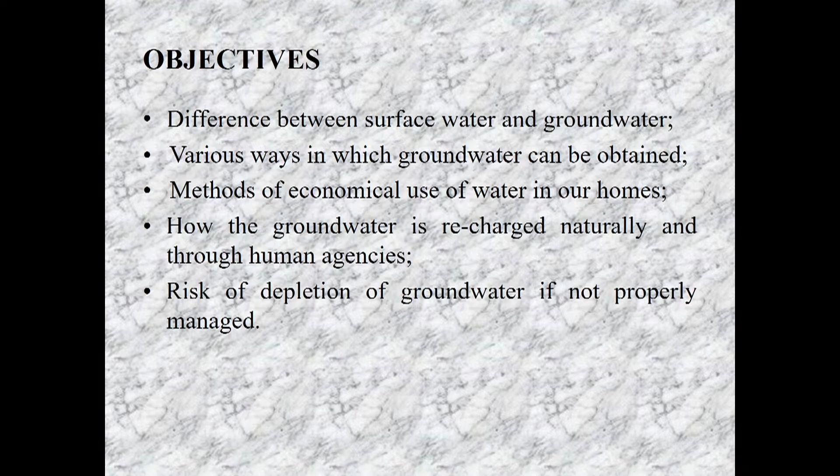During this program we will discuss the difference between surface water and underground water, various ways in which underground water can be obtained, methods of economical use of water in our homes, and how groundwater recharges naturally as well as through human agencies. Lastly, we will discuss the risk of depletion of groundwater if not properly managed.

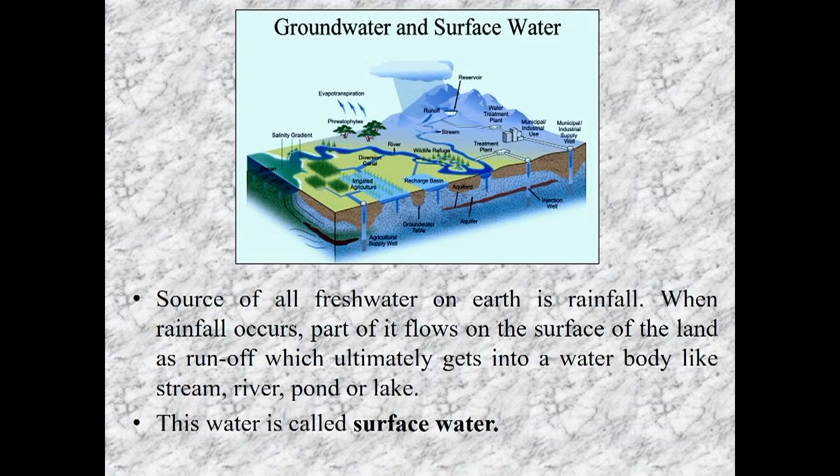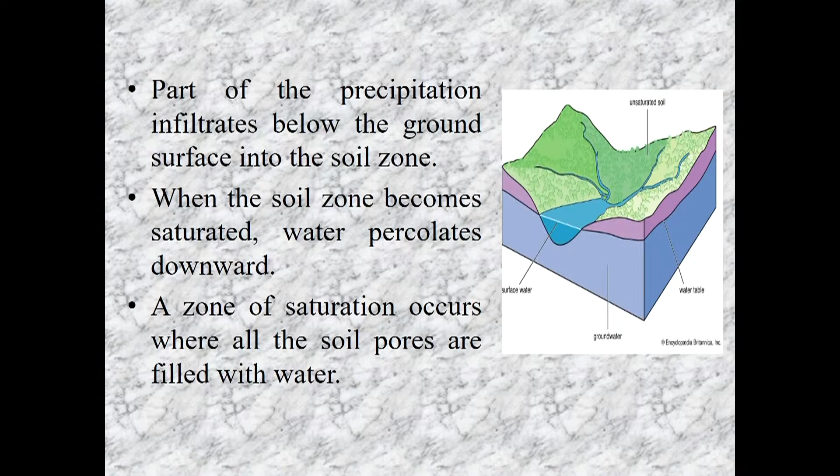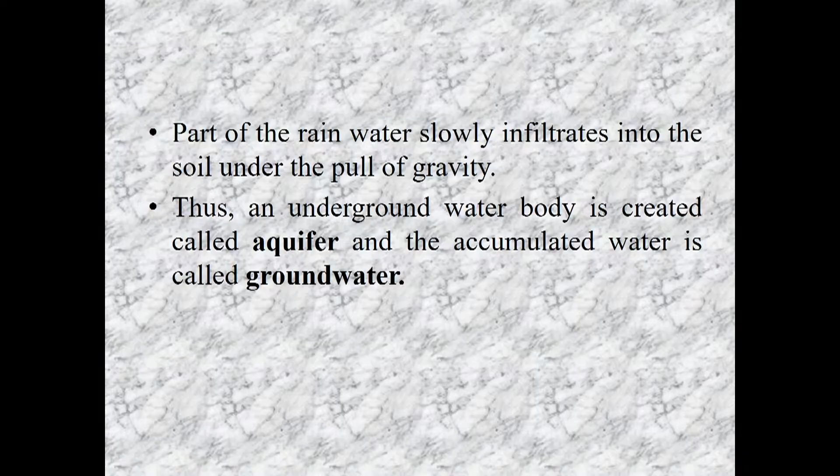Part of the precipitation infiltrates below the ground surface into the soil zones. When the soil zones become saturated, water percolates downward, and the zone of saturation occurs where all the soil pores are filled with water. Part of the rainwater slowly infiltrates into the soil under the pull of gravity, creating an underground water body known as an aquifer, and the water accumulating inside it is called groundwater. Under the pull of gravity, groundwater flows slowly and steadily through the soil. In low areas it emerges in springs and streams, and both surface water and groundwater eventually return to the ocean, where evaporation replenishes the supply of atmospheric water vapor.

This water cycle continues constantly. Wind carries moist air over land, precipitation occurs, and the hydrological cycle continues. The process of precipitation replenishing the groundwater supply is known as recharge, and recharge occurs only during the rainy season in tropical climates or during spring in temperate climates. About 10 to 20% of precipitation that falls on the ground percolates through soil and contributes to water-bearing stratas, filling the aquifer.

An aquifer is a layer of rock or soil that can take in and hold water. Groundwater is constantly in motion, though it moves very slowly; the actual rate depends on the transmissibility and storage capacity of the aquifer. Sometimes outflow of groundwater takes place through springs, which are a natural discharge point of subterranean water at the surface of the ground, or directly into the bed of a stream, lake, or sea. Groundwater also flows through riverbeds, which is the ground over which a river flows. The renewal time of groundwater near the water table may be one year or less, while in deep aquifers it may be as long as thousands of years.

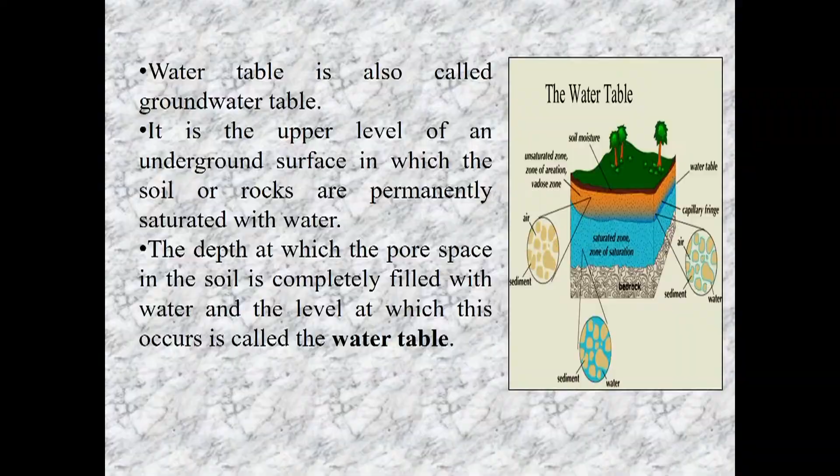The water table separates the groundwater zone that lies below it from the capillary fringe or zone of aeration which lies above. The water table fluctuates both with the season and from year to year because it is affected by rainfall and climatic variations.

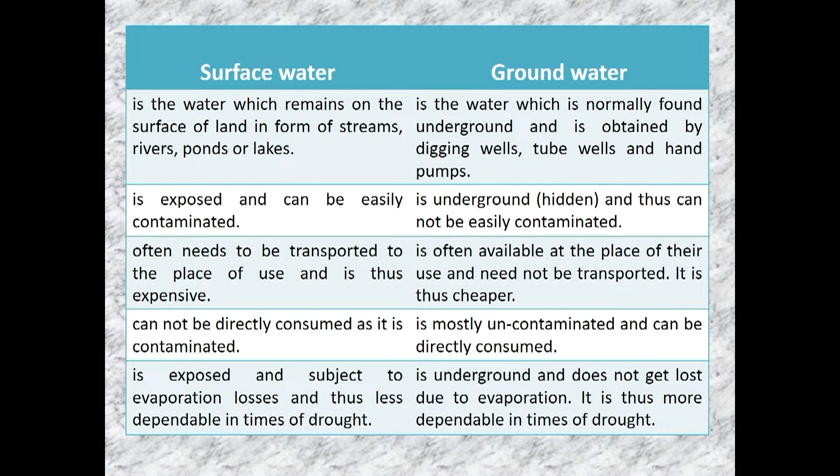Surface water often needs to be transported to the place of use and this is expensive. Groundwater is available at the place of its use and need not be transported, so it is cheaper. Surface water cannot be directly consumed as it is contaminated, but in case of groundwater, it is uncontaminated and can be directly consumed. Surface water is exposed and subject to evaporation losses and is thus less dependable in times of drought. In case of groundwater, since it is underground, it doesn't get lost due to evaporation and is thus more dependable in times of drought.

Now we will talk about the different groundwater resources. The value of an aquifer depends on the porosity of the geological layer of which it is formed. Water is withdrawn from an aquifer by pumping it out of the well or infiltration gallery.

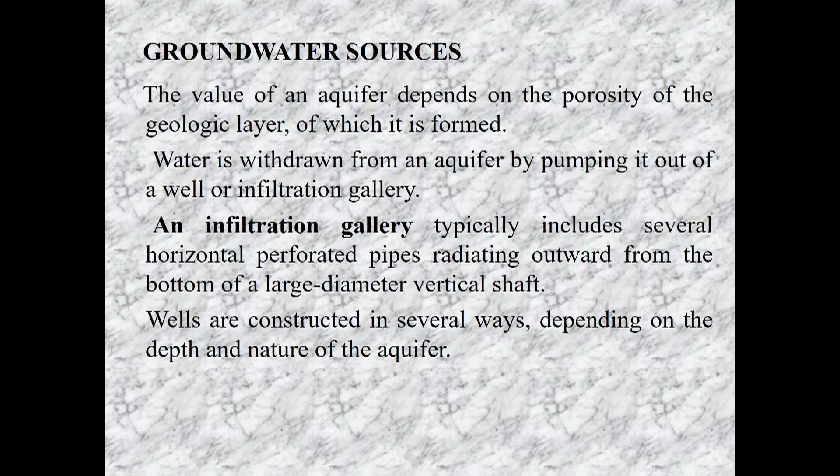An infiltration gallery typically includes several horizontal perforated pipes radiating outwards from the bottom of a large diameter vertical shaft, and wells are constructed in several ways depending on the depth and nature of the aquifer.

So wells used for public water supplies are usually more than 100 feet deep and 4 to 12 inches in diameter, and must penetrate large aquifers that can provide dependable yields of good quality water.

A submersible pump, which is driven by an electric motor, can be used to raise water to the surface. There are a large number of methods to obtain groundwater, including springs, dug wells, shallow tube wells, deep tube wells, and hand pumps.

So we will talk about different methods of groundwater abstraction - from where we get water, how we can extract groundwater. The water table generally follows the topography of the ground surface. The slope in the water table profile results in subsoil flow. Groundwater movement is comparatively very slow. The flow depends on slope and permeability.

When the water table is above the surface water level in some hilly areas, groundwater flows out as a spring, and this spring water can easily be used as a source of drinking water. In hilly areas, we use this spring water for drinking purposes.

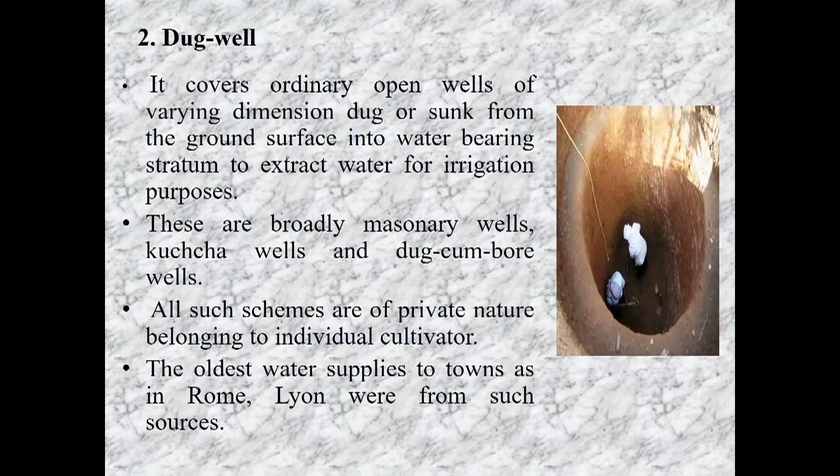The second method is the dug well, meaning digging wells. It covers ordinary open wells of varying dimensions, dug and sunk from the ground surface into the water bearing stratum to extract water for irrigation purposes. These are broadly masonary wells, kuchcha wells and dug-cum-bore wells. All such schemes are of private nature belonging to individual cultivators. The oldest water supplies to towns, as in Rome, were formed from such sources. The majority of the hilly population, like in the Himalayan region, is dependent on this type of source.

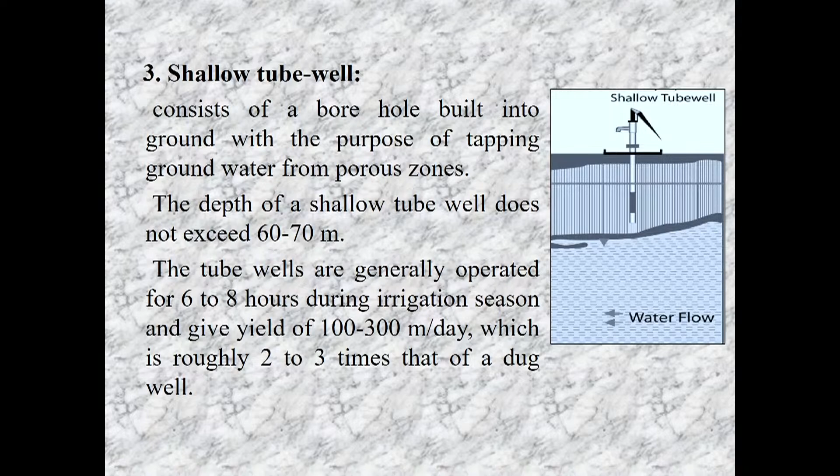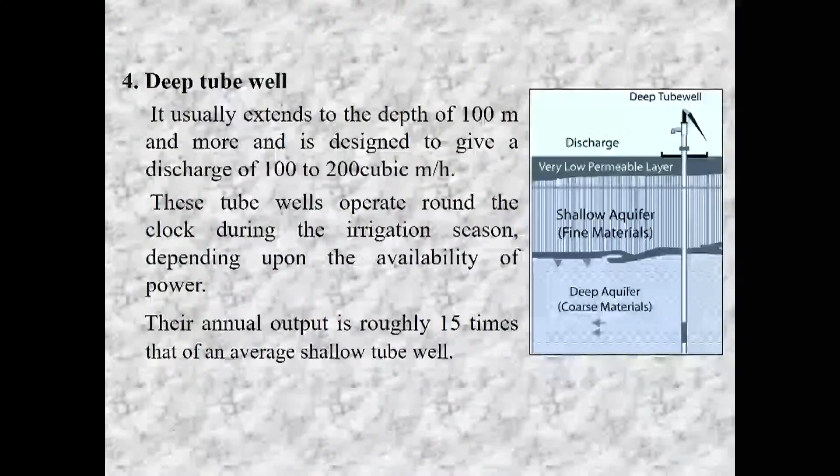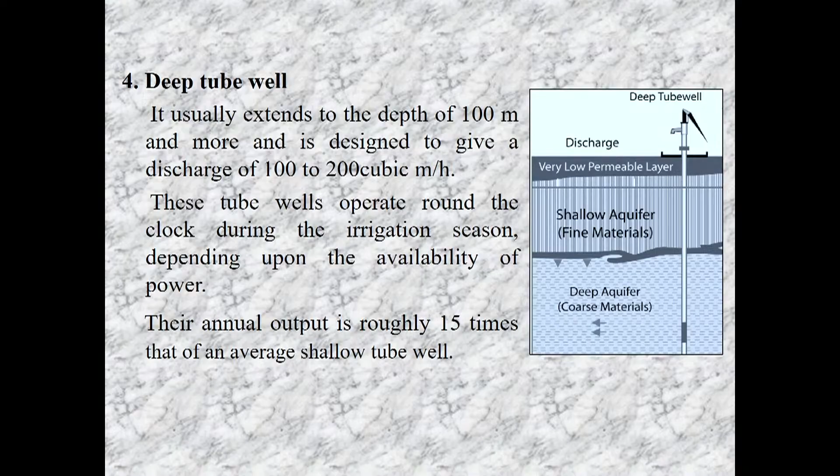We discussed shallow tube wells, now let's talk about deep tube wells. It usually extends to a depth of 100 meters and more, and is designed to give a discharge of 100 to 200 cubic meters per hour. These tube wells operate round the clock during the irrigation season, depending upon the availability of power. Their annual output is roughly 15 times that of an average shallow tube well.

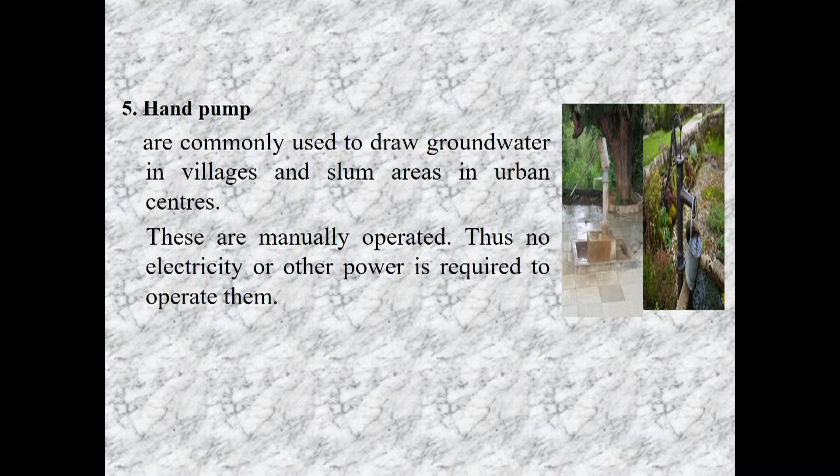Now we talk about economic uses of water, about how we can save water at home. Economic use of water can have major environmental, public health and economic benefits by helping to improve water quality, maintain aquatic ecosystems and protect drinking water resources. By using water more efficiently and purchasing more water-efficient products, we can save water. We can also help mitigate the effects of drought. Efficiency measures can also save money on water and energy bills.

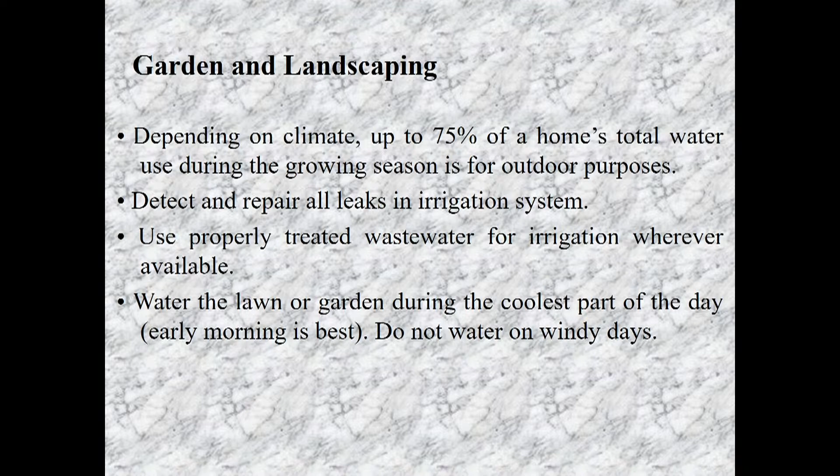Detect and repair all leaks in the irrigation system. Use properly treated wastewater for irrigation whenever available. Water the lawn or garden during the coolest part of the day, early morning or late evening, and don't water on windy days. Water trees and shrubs with deep root systems for longer and less frequently than shallow rooted plants, which frequently require a smaller amount of water.

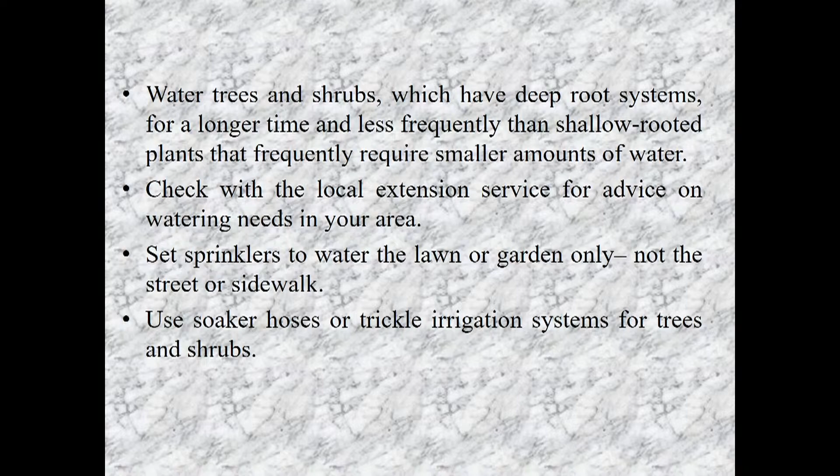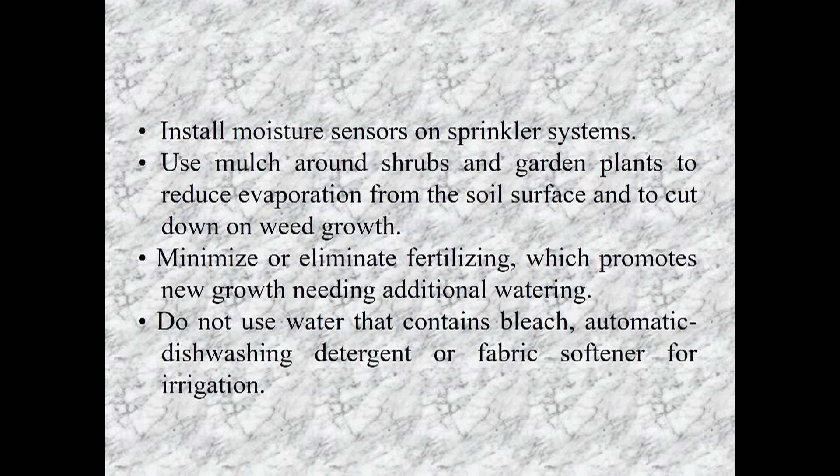Check with local extension services for advice on watering needs in your area. Set sprinklers to water the lawn or garden only, not the street or sidewalk. Use soaker hoses or trickle irrigation systems for trees and shrubs. Install moisture sensors on sprinkler systems. Use mulch around shrubs and garden plants to reduce evaporation from the soil surface and cut down on weed growth. Minimize or eliminate fertilizing, which promotes new growth needing additional watering. Don't use water that contains bleach, automatic dishwashing detergent or fabric softener for irrigation.

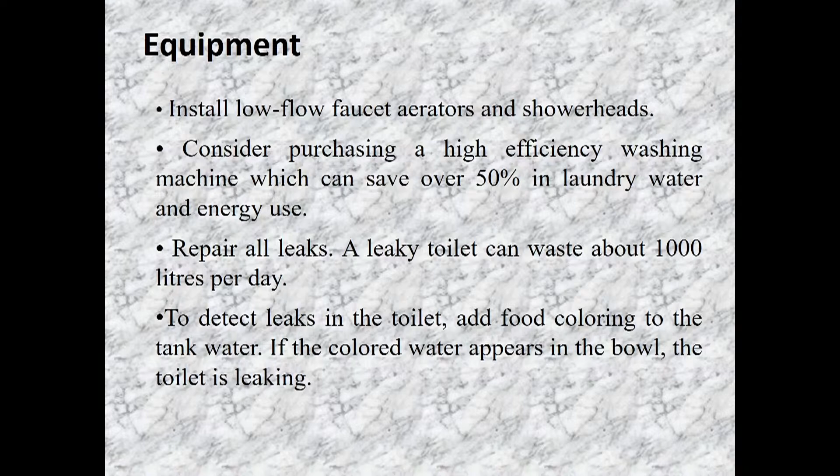Repair all leaks. A leaky toilet can waste about 1000 liters per day. To detect leaks in the toilet, add food coloring to the tank water. If the colored water appears in the bowl, the toilet is leaking.

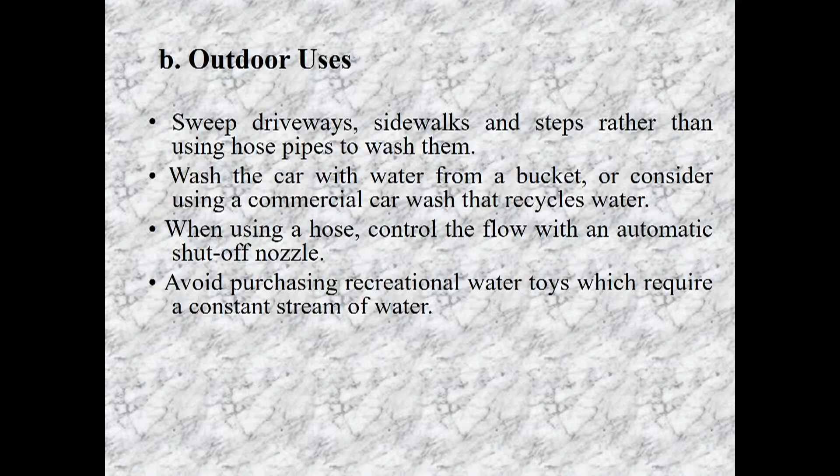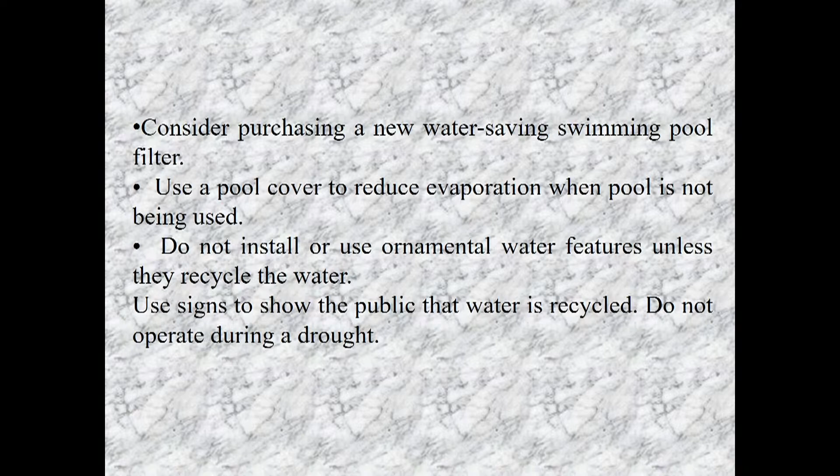Consider purchasing a new water saving swimming pool filter. Use a pool cover to reduce evaporation when the pool is not being used. Don't install or use ornamental water features unless they recycle the water. Use signs to show the public that water is recycled, and do not operate these features during a drought.

Next we will talk about artificial recharge. The increasing demand for water has increased awareness towards the use of artificial recharge to augment groundwater supplies.

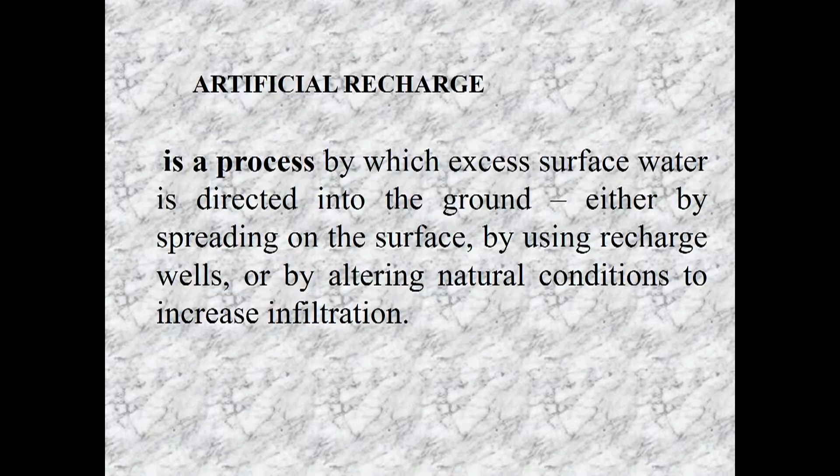Artificial recharge is a process by which excess surface water is directed into the ground, either by spreading on the surface, by using recharge wells, or by altering natural conditions to increase infiltration.

In other words, artificial recharge refers to the movement of water through man-made systems from the surface of the earth to underground water bearing strata, where it may be stored for future use. Artificial recharge, sometimes called planned recharge, is a way to store water underground in times of surplus to meet the demand in times of shortage.

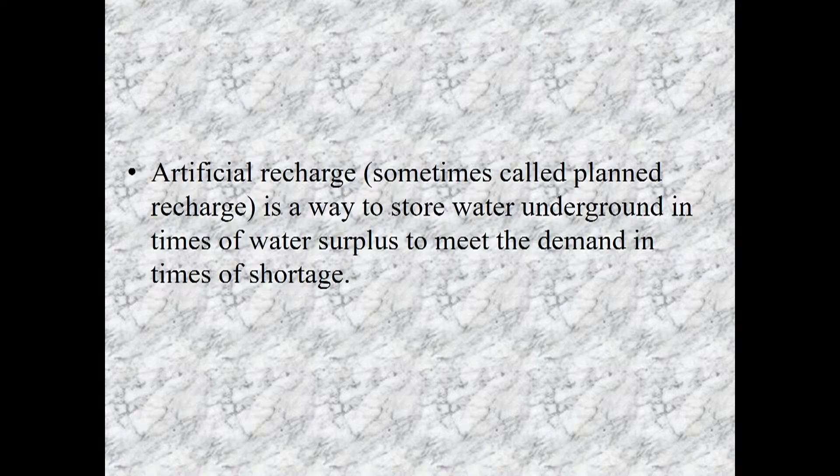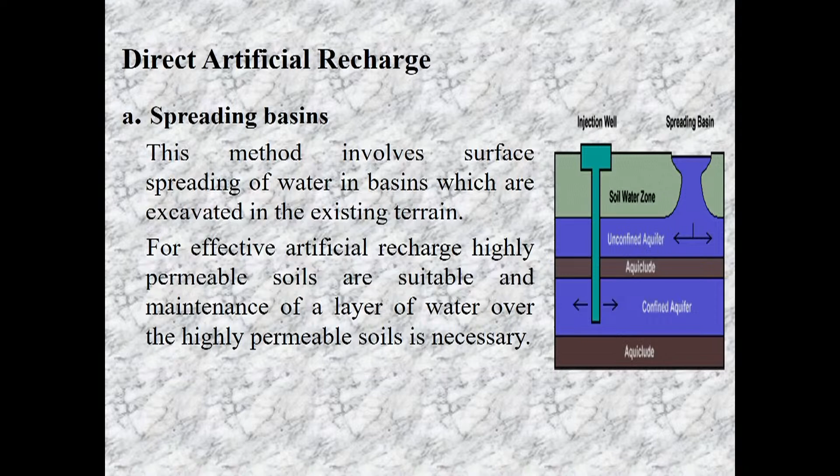Now coming to direct artificial recharge, it can be done by several ways and means. One is spreading basins. These methods involve surface spreading of water in basins excavated in the existing terrain. For effective artificial recharge, highly permeable soils are suitable, and maintenance of a layer of water over the highly permeable soils is necessary.

The second type can be recharge pits and shafts. Conditions that permit surface spreading methods for artificial recharge are relatively rare, as often areas of low permeability lie between the land surface and the water table. In such situations, pits and shafts could be effective. Unfiltered runoff waters leave a thin film of sediments on the sides and bottom of the pits, which requires maintenance to sustain high recharge rates. Shafts may be circular, rectangular or square in cross section, and may be backfilled with porous material.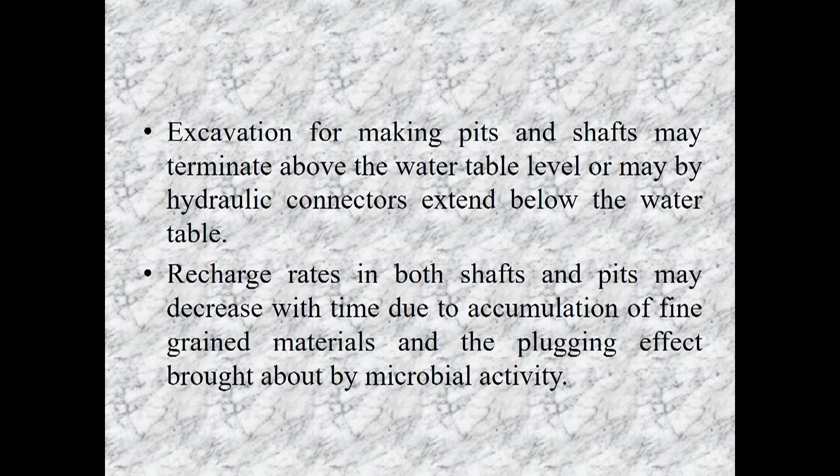Shafts may be circular, rectangular or square in cross section and may be backfilled with porous materials. Excavation for making pits and shafts may terminate above the water table level, or may by hydraulic connectors extend below the water table. Recharge rates in both shafts and pits may decrease with time due to accumulation of fine grain material and the plugging effect brought about by microbial activities.

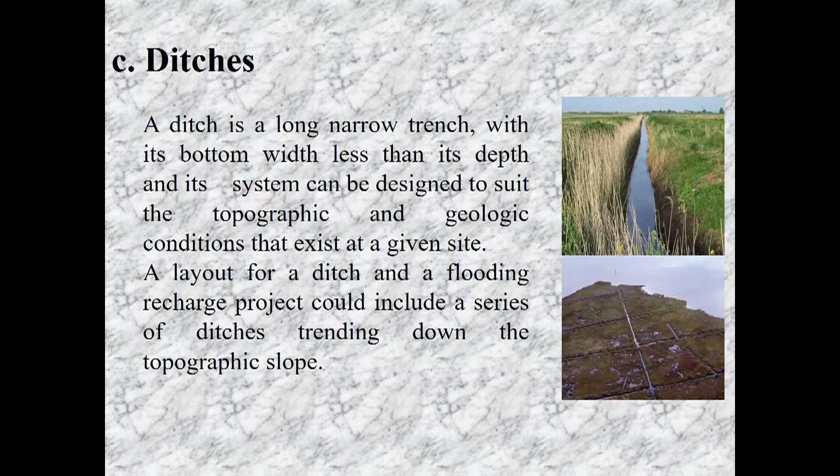The third type is ditches. A ditch is a long narrow trench with its bottom width less than its depth, and its system can be designed to suit the topographic and geological conditions that exist at a given site. A layout for a ditch and flooding recharge project could include a series of ditches trending down the topographic slope, which could terminate in a collection ditch designed to carry away the water that does not infiltrate.

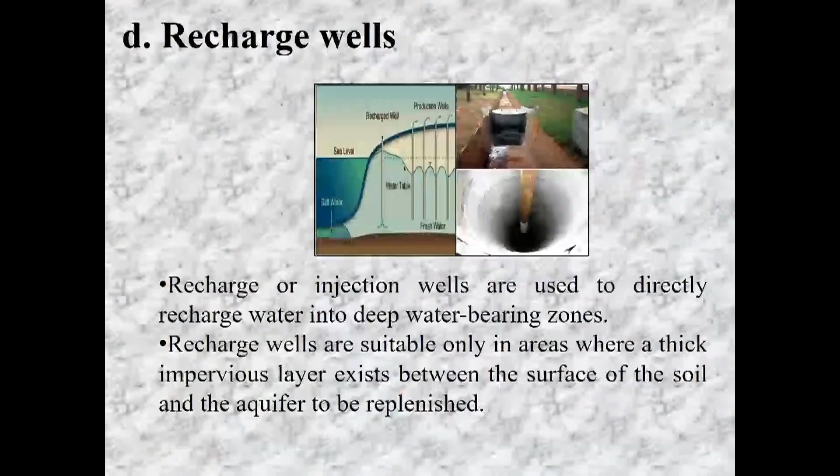This would reduce the accumulation of fine material. Recharge wells are used to directly recharge water into deep water-bearing zones. Recharge wells are suitable only in areas where a thick impervious or solid layer exists between the surface of the soil and the aquifer to be replenished.

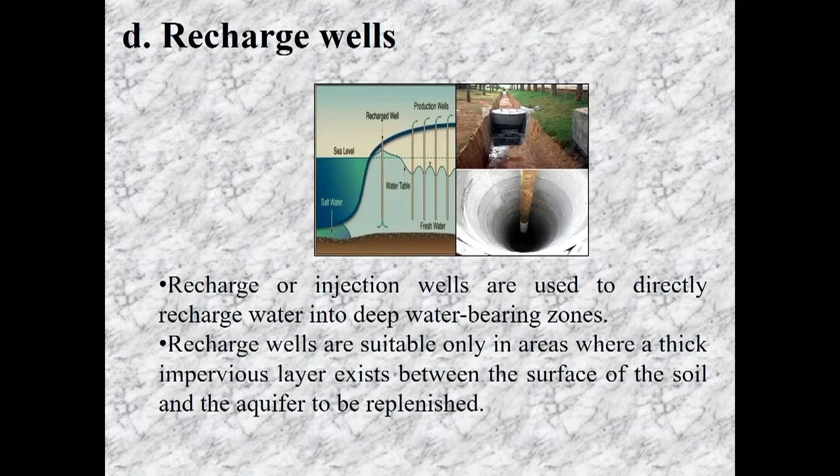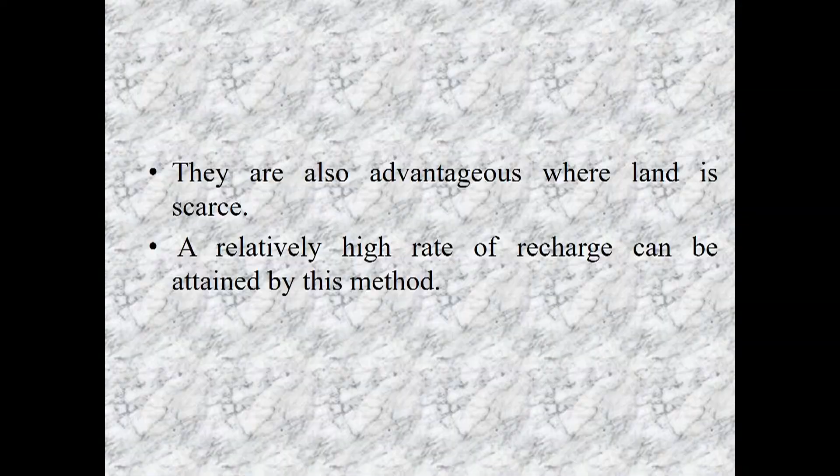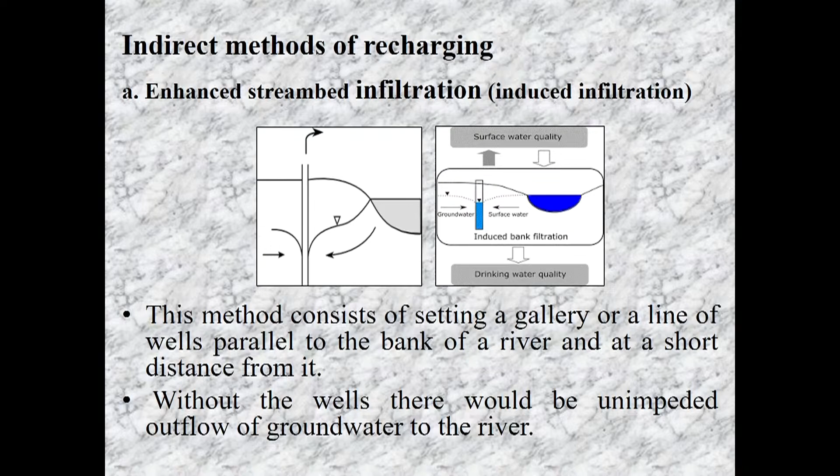They are also advantageous where land is scarce. A relatively high rate of recharge can be attained by this method. The indirect method of recharging includes enhanced streambed infiltration or induced infiltration, and this method consists of setting a gallery or a line of wells parallel to the bank of a river and at a short distance from it. Without the wells, there would be unimpeded outflow of groundwater to the river.

When a small amount of groundwater is withdrawn from the gallery parallel to the river, the amount of groundwater discharged into the river decreases. The water recovered by the gallery consists of natural groundwater, and each groundwater withdrawal is accompanied by a drawdown in the water table. For high recovery rates, this drawdown tends to lower the groundwater table at the shoreline below that at the river.

Surface water from the river will be induced to enter the aquifer and flow into the gallery. So, in areas where the stream is separated from the aquifer by material of low permeability, leakage from the stream may be so small that the system is not feasible.

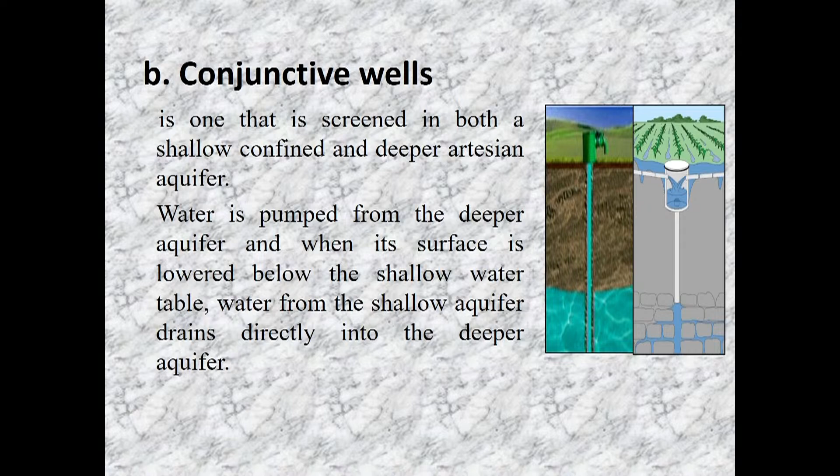The next type is conjunctive wells. This is also one that is screened in both the shallow confined and deeper artesian aquifer. Water is pumped from the deeper aquifer, and when its surface is lowered below the shallow water table, water from the shallow aquifer drains directly into the deeper aquifer. Water augmentation by conjunctive wells has an advantage of utilizing sediment-free groundwater, which greatly reduces the damage of clogging well screens.

So, there are some advantages and disadvantages of artificial recharge. First, we will talk about advantages. While recharging, rain and surface water infiltrate the soil and percolate down through the various geological formations and get naturally cleansed. Very few special tools are needed to dig drainage wells. In rock formations with high structural integrity, few additional materials may be required to construct the wells.

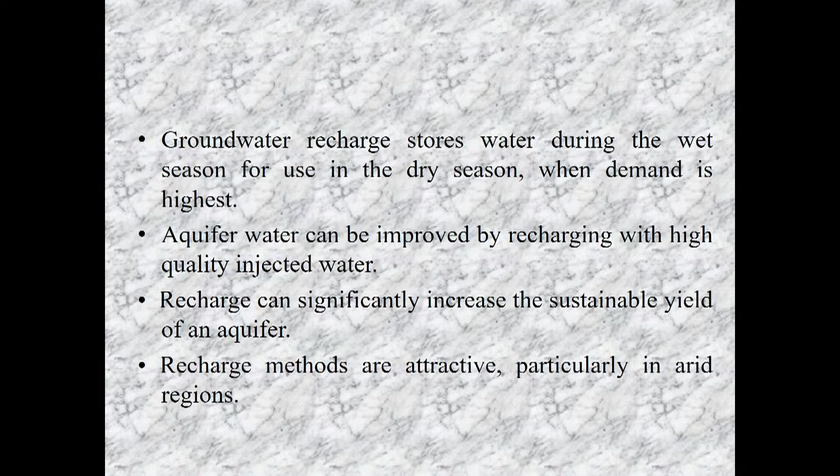Groundwater recharge stores water during the wet season for use in the dry season when demand is highest. Aquifer water can be improved by recharging with high quality injected water. Recharge can significantly increase the sustainable yield of an aquifer. Recharge methods are attractive, particularly in arid regions. Most aquifer recharge systems are easy to operate.

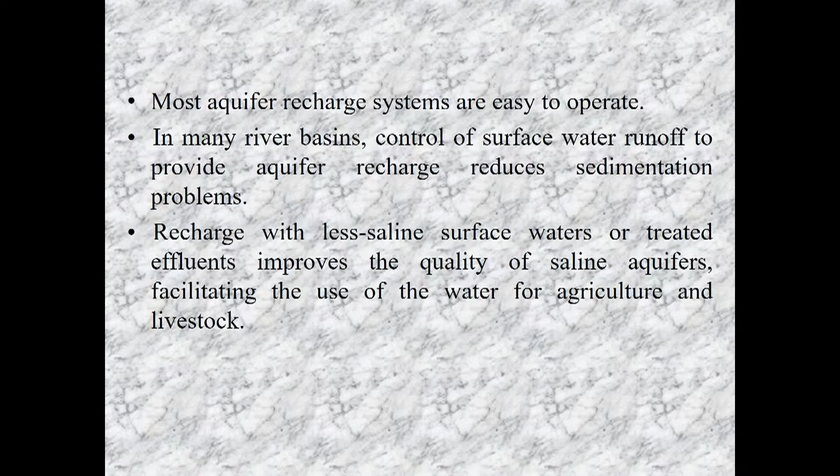In many river basins, control of surface water runoff to provide aquifer recharge reduces sedimentation problems. Recharge with less saline surface water or treated effluent improves the quality of saline aquifers, facilitating the use of the water for agriculture and livestock.

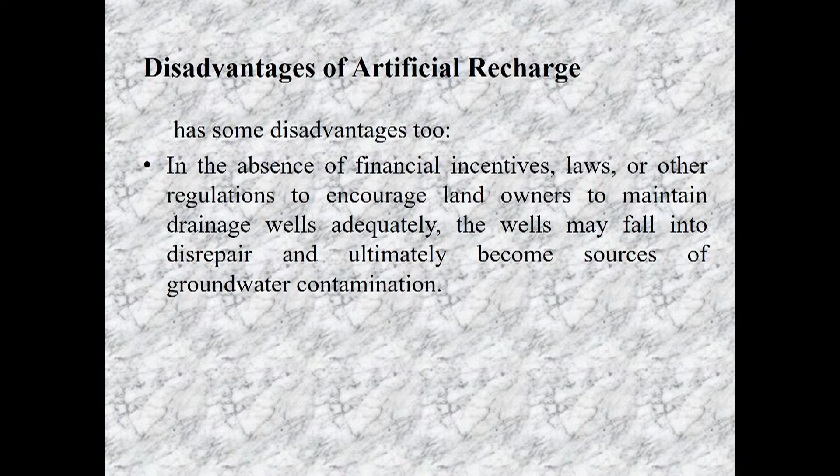There are some disadvantages also. In the absence of financial incentives, laws or other regulations to encourage landowners to maintain drainage wells adequately, the wells may fall into disrepair and ultimately become sources of groundwater contamination. There is a potential for contamination of the groundwater from injected surface water runoff, especially from agriculture fields and road surfaces, unless the surface runoff is pre-treated before injection. Unless significant volumes are injected into an aquifer, groundwater recharge may not be economically feasible. The hydrology of an aquifer should be investigated and understood before any full-scale recharge project is implemented.

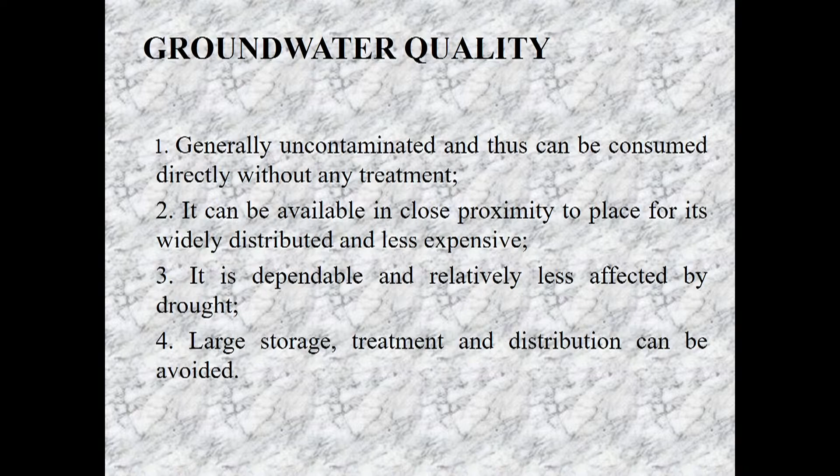So now we will discuss groundwater quality. As we know, groundwater plays an important role in India, particularly as a drinking water resource. Groundwater has a number of unique features that make it suitable as a water supply source. First, it is generally uncontaminated and thus can be consumed directly without any treatment. It can be available in close proximity to its place of use, as it is widely distributed and less expensive. It is dependable and relatively less affected by drought. Large storage, treatment and distribution can be avoided.

Nearly 85% of the Indian population today is dependent on groundwater for their domestic demand. Groundwater is particularly important as a source of drinking water in rural areas. It also plays an important role in agriculture for both irrigation and bathing cattle. Industrial demand for groundwater is also high, as many prefer to use groundwater for the unique features we already discussed.

Groundwater quality is being increasingly threatened by agricultural, urban and industrial waste which leaches or is injected into underlying aquifers. Once pollution has entered the subsurface environment, it may remain concealed for many years and become dispersed over wide areas, rendering groundwater supplies unsuitable for human uses.

Coming to the reasons for declining groundwater quality: a vast majority of groundwater quality problems are caused by contamination, overexploitation, or a combination of both. Most groundwater quality problems are difficult to detect as they may be concealed below the surface, and they are also hard to resolve. The solutions are usually very expensive, time consuming, and not always effective. Many times the contamination is not detected until noxious substances actually appear in water used, by which time the pollution has often dispersed over a large area.

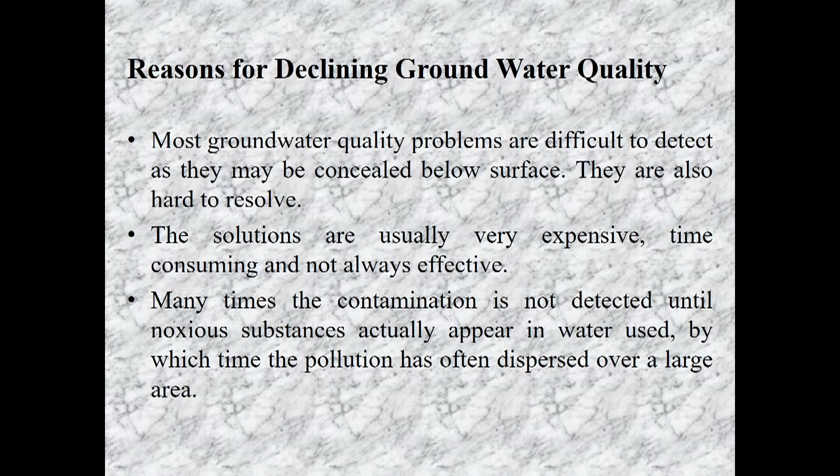All kinds of activities carried out on land have the potential to contaminate groundwater. Industrial discharge, landfills and subsurface injection of chemicals and hazardous waste are obvious surface sources of groundwater pollution. These concentrated sources can be easily detected and regulated, but the more difficult problem is associated with diffuse sources of pollution like leaching of agrochemicals and animal waste, subsurface discharges from sewerages and septic tanks, and infiltration of polluted urban runoff and sewage where sewerage does not exist or is defunct. Diffuse sources can affect an entire aquifer, which is difficult to control and treat. The only solution to diffuse sources of pollution is to integrate land use with water management.

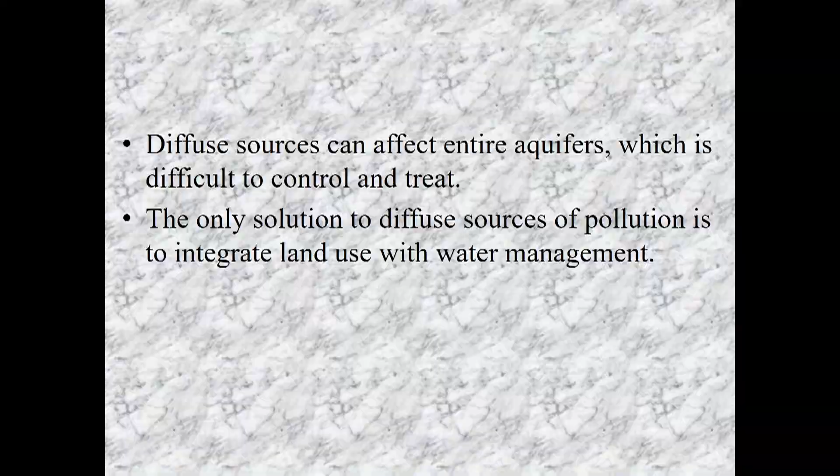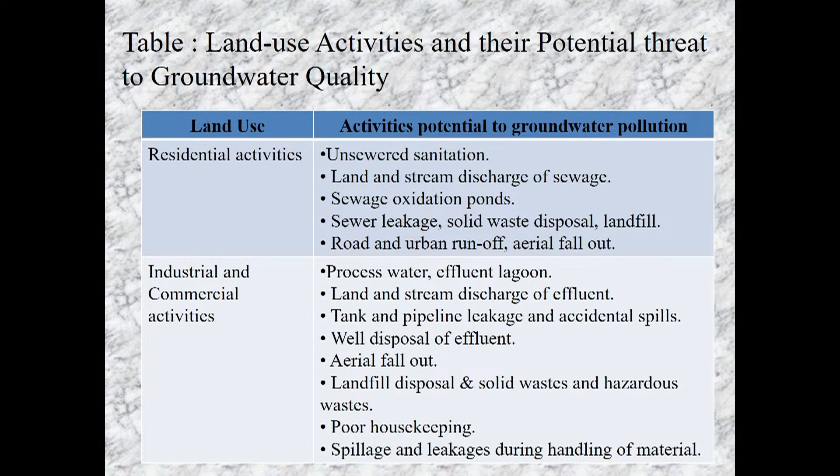Next we will talk about land use activities and their potential threat to groundwater quality. Look at the slide. You find residential activities that have more potential to pollute groundwater in the form of unsewered sanitation, land and stream discharge of sewage, sewage oxidation ponds, sewer leakage, solid waste disposal, landfill, road and urban runoff, and aerial fallout. Process industrial and commercial activities include process water, effluent lagoons, land and stream discharge of effluent, tank and pipeline leakage and accidental spills, well disposal of effluent, aerial fallout, landfill disposal of solid waste and hazardous waste, poor housekeeping, and spillage and leakage during handling of material.

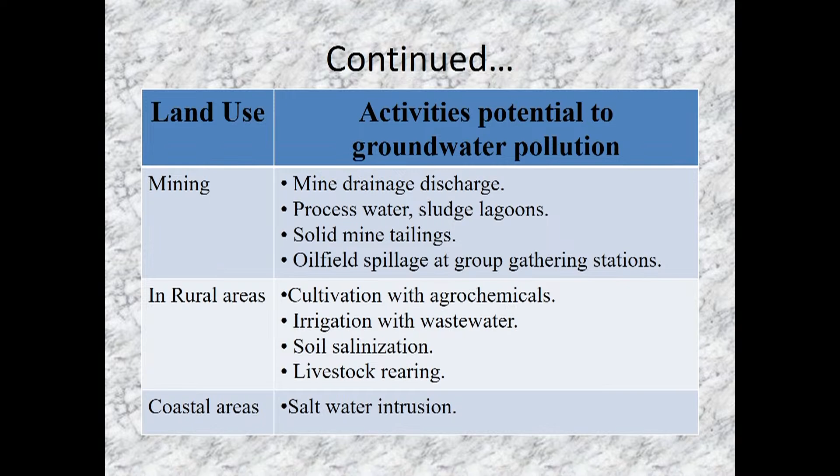Mining also has potential to pollute groundwater: mine drainage discharge, process water, sludge lagoons, solid mine tailings, oil field spillage at group gathering stations. In rural areas, cultivation with agrochemicals, irrigation with wastewater, soil salinization, and livestock rearing are concerns. In coastal areas, saltwater intrusion is a concern.

Now come to the common groundwater contaminants. Nitrates are common; dissolved nitrates commonly contaminate groundwater. High levels of nitrate can cause blue baby disease in children, may form carcinogens, and can accelerate eutrophication in surface water. Sources of nitrates are sewage, fertilizers, air pollution, landfill and industries.

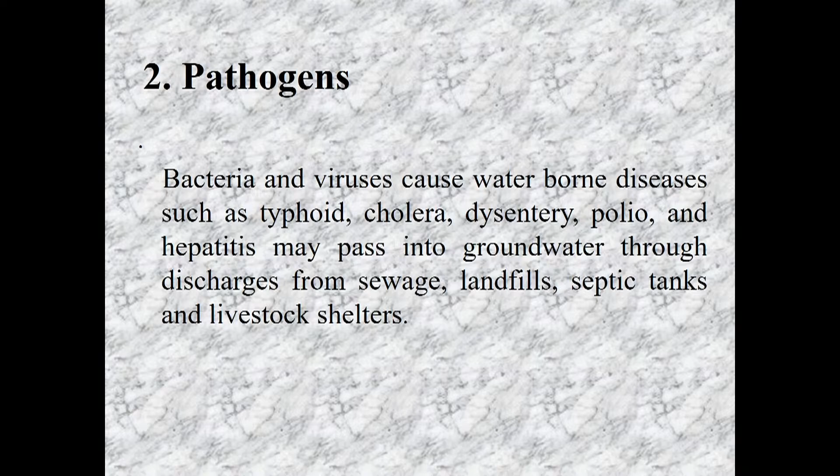Poor hygiene of wells and inadequate segregation of drainage channels from wells may cause pathogenic contamination of groundwater. Seepage from solid waste dumps and municipal drains may also cause pathogenic contamination. Pathogens, bacteria and viruses can cause waterborne diseases such as typhoid, cholera, dysentery, polio and hepatitis, which may pass into the groundwater through discharge from sewage, landfill, septic tanks and livestock shelters.

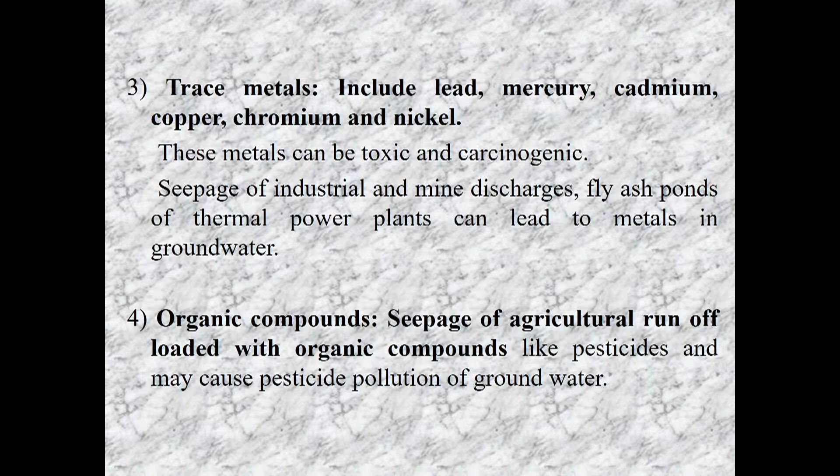Trace metals which include lead, mercury, cadmium, copper, chromium and nickel can be toxic and carcinogenic. Seepage of industrial and mine discharge, and fly ash ponds of thermal power plants, can lead to metals in groundwater. Organic compounds such as pesticides and insecticides also cause groundwater pollution.

Next we will talk about risk of depletion of groundwater. The demand of water has increased over the years and this has led to water scarcity in many parts of the world. About 2 billion people depend on groundwater supply, withdrawing about 20% of global water annually, much of it from shallow aquifers. So there are some risk factors for depletion of groundwater.

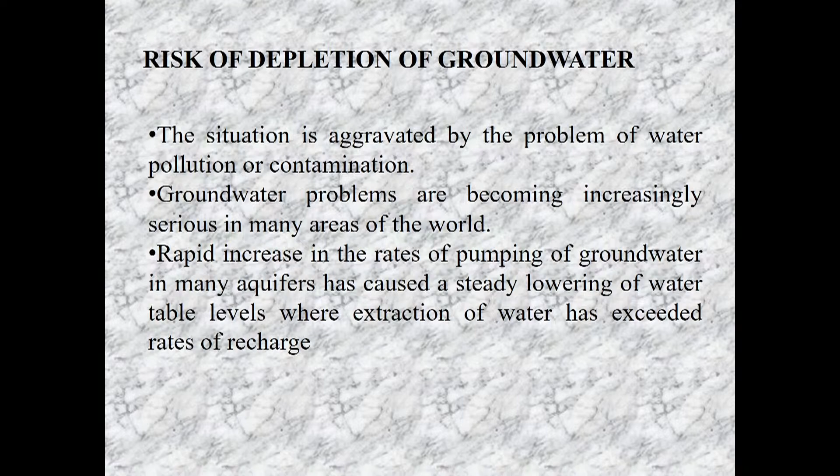The situation is aggravated by the problem of water pollution or contamination. Groundwater problems are becoming increasingly serious in many areas of the world. Rapid increase in the rate of pumping of groundwater in many aquifers has caused a steady lowering of water table levels where extraction of water has exceeded the rate of recharge.

Causes of groundwater depletion: it has been caused by human actions. During the past two decades, the water level in several parts of India has been falling rapidly due to an increase in extraction. The number of wells drilled for irrigation, for both food and cash crops, has rapidly and indiscriminately increased.

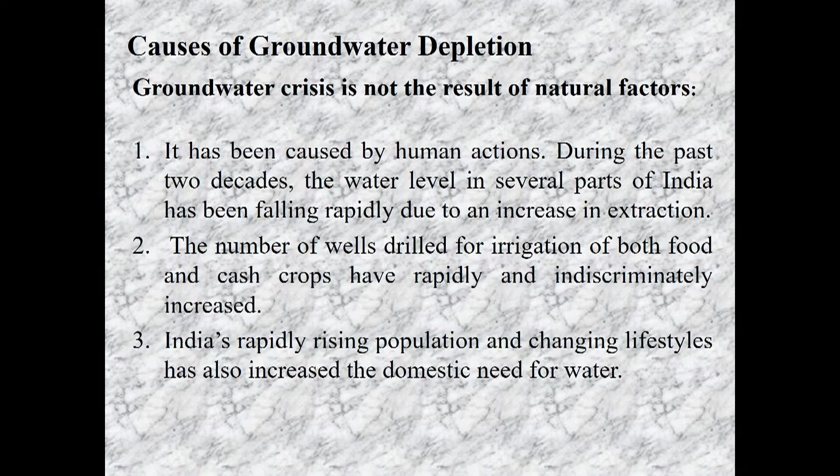India's rapidly rising population and changing lifestyles has also increased the domestic need for water. Water requirement for industry also shows an overall increase. Intense competition among users, as in agriculture, industry and domestic sector, is steadily lowering the groundwater table.

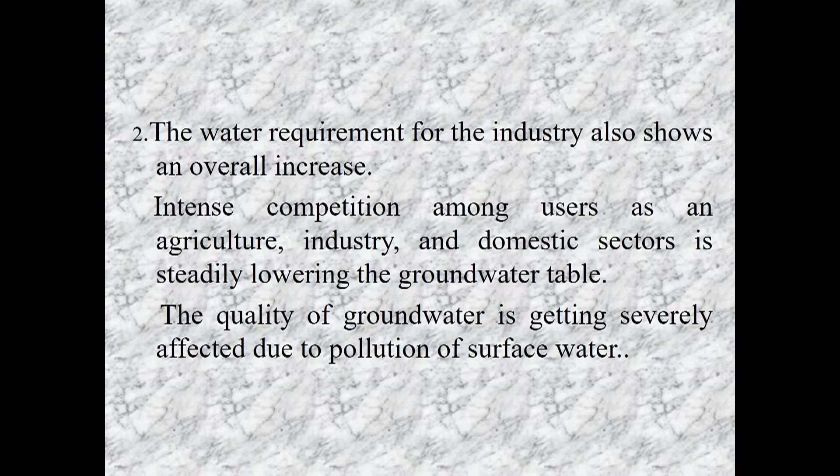Quality of groundwater is getting severely affected due to pollution of surface water. Besides, discharge of untreated wastewater through bores and leachate from unscientific disposal of solid waste also contaminate groundwater, thereby reducing the quality of freshwater resources.

Groundwater has two components: one is the static part and the other is dynamic, which comprises annual addition due to recharge. The yearly use needs to be limited. During deficit years, however, a part of the static component is drawn for use, expecting recuperation during the next surplus year. So depending on static storage for a long time amounts to mining of underground water.

Ideally, the age of groundwater used should be as young as possible. The greater the age, the longer the period for which mining has been carried out.

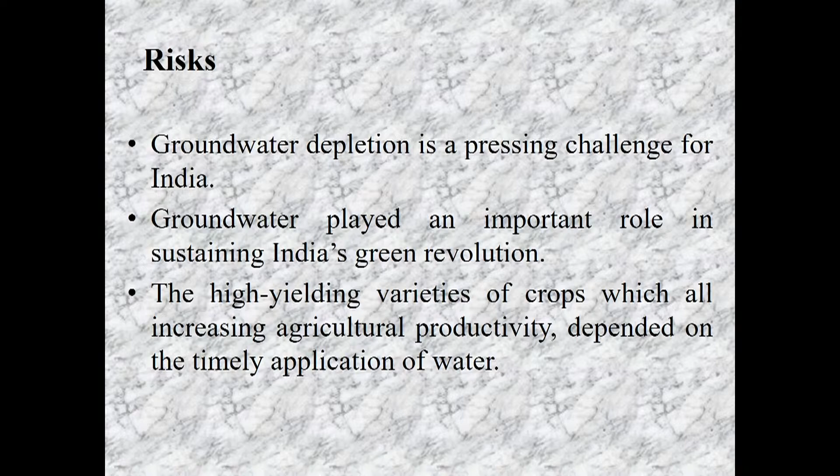Groundwater depletion is a pressing challenge for India. Groundwater plays an important role in sustaining India's green revolution. The high yielding varieties of crops, which allowed increasing agricultural productivity, are dependent on timely application of water. This led to a spurt in groundwater structures, with enterprising farmers making technological and institutional innovations not only to extract groundwater but also to transport it to the fields of other farmers, giving rise to flourishing groundwater markets.

Falling water table in several states now threatens agricultural sustainability. This has been encouraged by policies for cheap electricity and the absence of property right structures for water withdrawal.

During the rainy season, availability of water from precipitation is far in excess of natural and man-made holding capacity, which results in floods. During the non-rainy period, high evaporation rates coupled with high water demand cause drought conditions requiring import of water. Flood and drought constitute the extreme manifestation of the hydrologic cycle. The situation is exaggerated due to depleting forest cover in the country.

Supply of groundwater is not unlimited, and it is not always available in good quality. In many cases, the abstraction of large quantities of groundwater has resulted in the drying up of wells, salt water intrusion, and drying up of rivers that receive their flow in dry seasons.